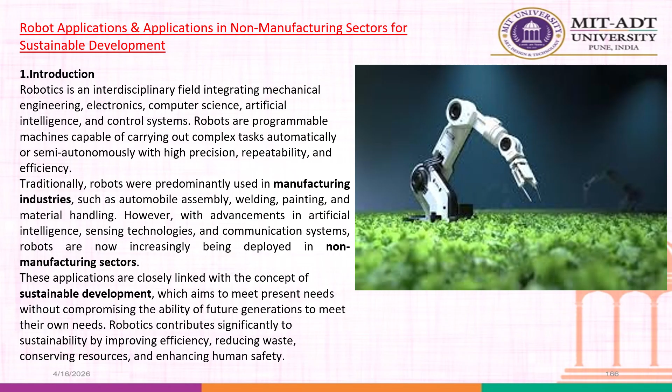Let's go to the next slide, an overview of robot applications in the non-manufacturing area. There are many more areas where robots perform very well. Firstly, robot applications can be broadly categorized into manufacturing applications.

As manufacturing application is the industrial utilization of the robot, mainly first with assembly line automation. Another purpose is welding and painting, CNC machining, and material handling. That is the manufacturing application of the robot.

Another category, 2.2, is non-manufacturing application, mainly used in the healthcare system as service robots, agriculture field robots, disaster management systems, environmental monitoring, logistics and transportation, domestic services, defense and security purposes. These focus mainly on non-manufacturing applications and their role in sustainability.

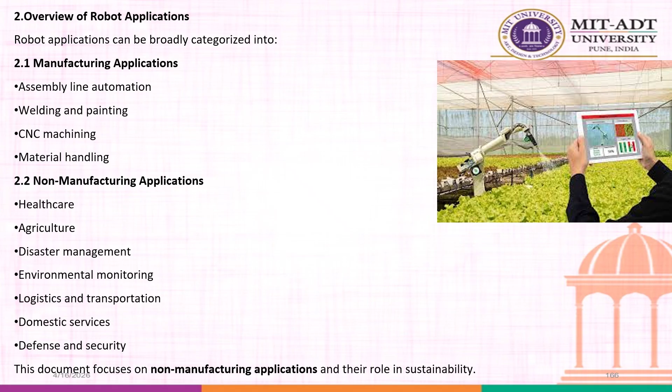Now, as per our unit content, this is the chapter for non-manufacturing application of the robot. Let's go further into application in the non-manufacturing sector. Starting with the first one.

Healthcare is one of the most impactful sectors where robotics have revolutionized operations. As seen during the COVID duration, there were many types of service robots which provided services to COVID patients at that time.

The main applications of healthcare and medical robots: first is the surgical robot, which supports the patient during surgery, enabling minimally invasive surgeries with high precision. Number two is rehabilitation robots, which assist patients in recovery through guided movements. Number three is the telepresence robot, which allows doctors to consult patients remotely. Next is the hospital service robot, which we discussed before.

Robots are used for medicine delivery, cleaning, and logistics. This is the main utilization of healthcare and medical robots.

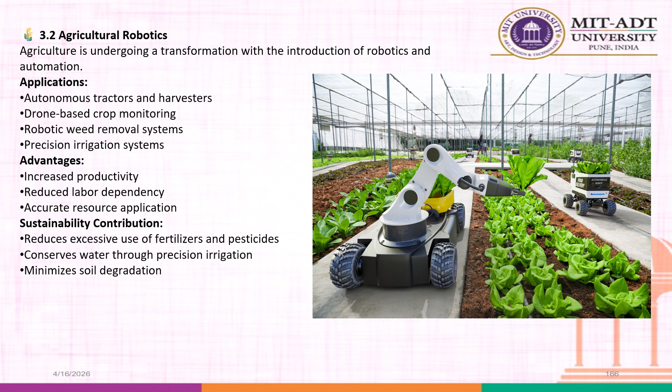For sustainability contribution, it reduces excessive use of fertilizers and pesticides, conserves water through precision irrigation, and minimizes soil degradation. That is the main use of agricultural robots.

The main applications of this type of robot include search and rescue robots in collapsed structures during disaster times, like floods or building collapses. Another application is firefighting robots, bomb disposal robots, and flood and earthquake response robots. These are some applications of disaster management and rescue robots.

Some advantages of this are that it operates in extreme conditions, meaning any type of condition, weather, or situation. It provides real-time data and reduces risk to human rescuers.

For sustainability contribution, it saves lives, enables efficient disaster response, and minimizes environmental damage. The main utilization of this kind of robot, to save human life, is its primary contribution.

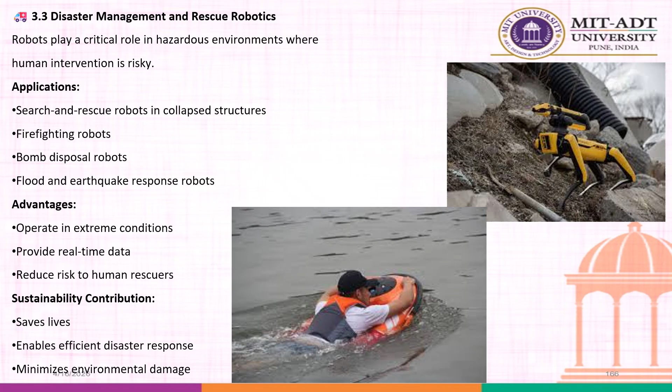Next category is environmental monitoring and protection. To keep society clean and dust-free, there is another application of robots for environmental monitoring and protection purposes.

In this field, robots are extensively used for monitoring and protecting natural ecosystems. Main applications include underwater robots for ocean exploration, air quality monitoring drones, forest surveillance robots, and wildlife tracking systems.

Some advantages of this system are that it continuously monitors environmental conditions, like dust particles and moisture content in the weather. It provides air quality monitoring via drones, and supports applications like underwater robots for ocean exploration, forest surveillance robots, and wildlife tracking systems.

The main advantage is that it continuously monitors and provides real-time data to human beings. It provides data accuracy and access to remote areas.

For sustainability contribution, this type of robot helps in climate change analysis. It protects biodiversity and supports conservation policies.

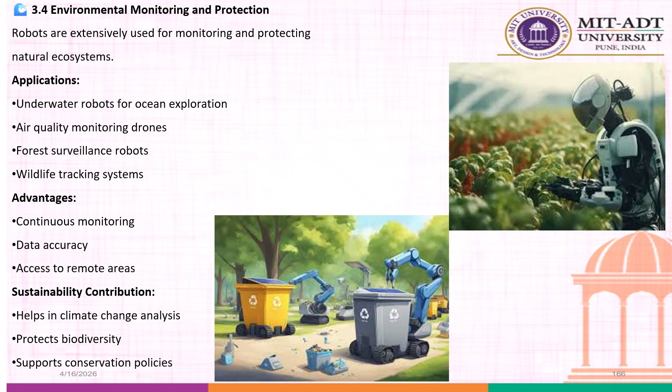Moving to the next one, 3.5: construction robotics. Construction robotics is transforming infrastructure development applications, including automated bricklaying robots, 3D printing of buildings, and inspection and maintenance robots. The main advantage of this type of robot is that it increases construction speed, improves safety, and reduces labor cost.

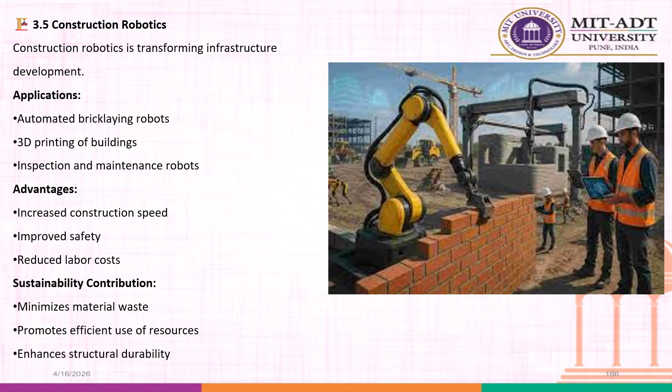For sustainability contribution, this type of robot minimizes material waste from the construction site, promotes efficient use of resources, and enhances structural durability.

Moving to the next slide: logistics and transportation. Automation in logistics has significantly improved efficiency.

Applications mainly for this type of application, using the ASRS system for a warehouse system. Applications include warehouse robots, autonomous delivery systems, and self-driving vehicles.

From this type of system, there are some advantages. Firstly, fast delivery. Number two, reduced operational cost. Number three, efficient inventory management. These are some advantages of this logistics and transportation kind of system.

For sustainability contribution in this type of system, it reduces the fuel consumption of the vehicle, lowers the carbon emissions, and optimizes the supply chains.

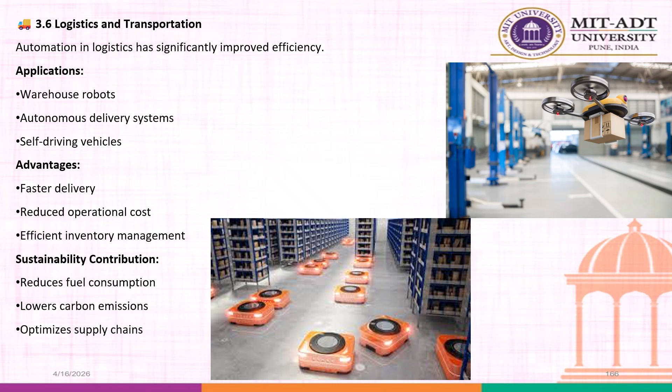Go with the next category, domestic and service robots. Mainly robots for domestic application. Robots are increasingly becoming part of everyday life. Every human wants a kind of robot for their purpose at home.

Mainly the main applications of this kind of robot are cleaning robots, personal assistant robots, and elderly care robots, which are again a kind of service robot.

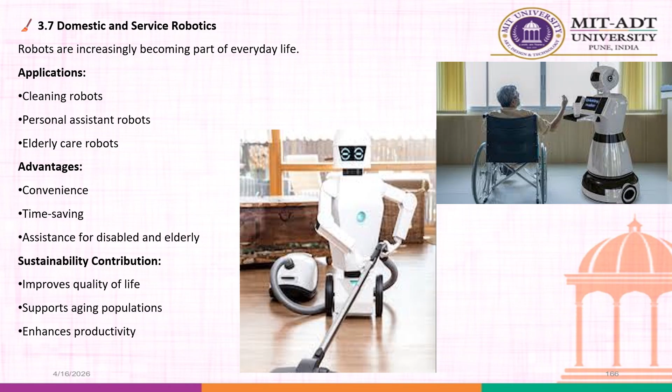The advantages from this kind of robot are convenience, time-saving purpose, and assistance for the disabled and elderly. For sustainability contribution, it improves the quality of life for human beings who are elderly or not medically fit, supports aging populations, and enhances productivity.

Go with the next category, defense and security systems. It is a main role of the robot in the non-industrial application area. Robots play a crucial role in the national security of the country.

Applications include surveillance drones, autonomous patrolling robots, and unmanned combat vehicles. These are some examples of defense and security purposes. There are numerous more examples for this field.

Mainly the purpose and advantages in this area are to reduce human risk, as we saw many times during bomb defusal, where we lost human beings checking whether a proper bomb is there or not.

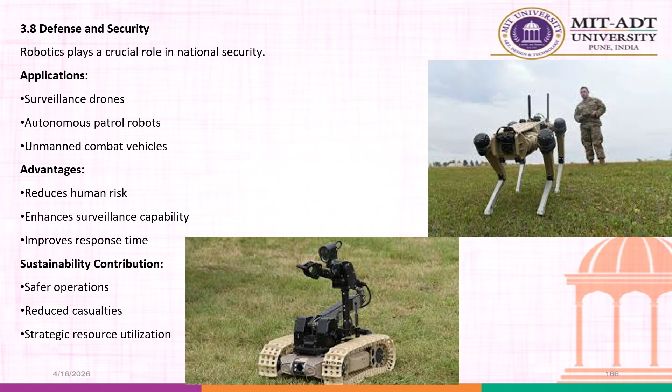That is the main advantage, to reduce human risk. It enhances surveillance capability and improves response time. For sustainability contribution, this type of robot provides safer operations, reduces casualties in our security system, and enables strategic resource utilization.

Go with the next category, the role of robotics in sustainable development. Robots contribute to sustainability in three key dimensions: firstly environmental sustainability, number two economic sustainability, number three social sustainability.

For environmental sustainability, as we see, it reduces pollution and waste, provides efficient resource utilization, and continuously monitors environmental conditions.

For economic sustainability, it increases productivity, reduces cost, and supports advancement in technological terms.

For social sustainability, it improves healthcare and safety systems, provides better living standards, and job transformation, meaning we need a skill-based role for social sustainability.

Go with the next slide. Now start with application in biomedical engineering and rehabilitation.

Biomedical engineering is an interdisciplinary field that integrates principles from engineering, biology, and medicine to develop technologies and systems that improve healthcare. It plays a crucial role in diagnosis, treatment, monitoring, and rehabilitation of patients.

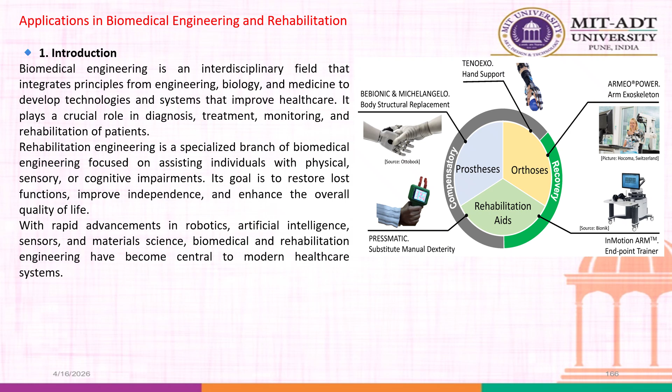Now the utilization of biomedical robots in biomedical engineering, one by one. Biomedical engineering covers a wide range of applications from diagnostic tools to life-saving devices.

Start with the first one, medical imaging systems. Medical imaging technologies allow non-invasive visualization of internal body structures. These systems are essential for diagnosis, monitoring disease progression, and treatment planning.

Now start with some types of this system. First one is X-ray imaging. Everyone knows what X-ray imaging is. It uses electromagnetic radiation to visualize bones and dense tissues.

Next one is the CT scan, known as computed tomography, which produces cross-sectional images using multiple X-ray projections. Next one is MRI, magnetic resonance imaging.

Using magnetic fields and radio waves to produce a detailed image of the soft tissue of the human body. Ultrasonic imaging uses high frequency sound waves for real time imaging.

These are some types and applications of this field: detection of tumors and fractures in the human body, brain and organ imaging, and prenatal monitoring.

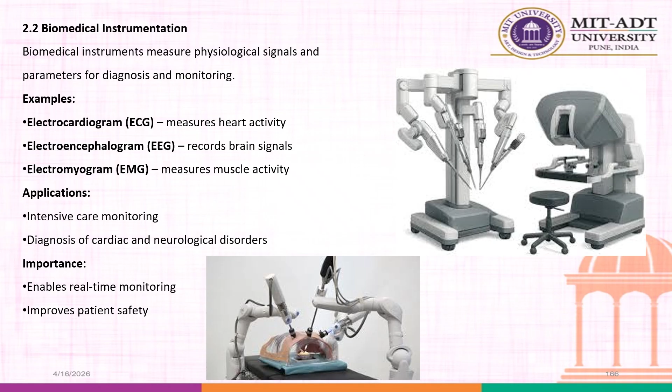There are some applications, like intensive care monitoring systems, used to diagnose cardiac and neurological disorders. The main importance is that they enable real-time monitoring and improve patient safety.

Prosthetic and artificial organs is again an innovative area for the robotics field. These devices replace or support damaged or missing biological structures of the human body. There are some types; firstly, everyone knows what a prosthetic system is.

Prosthetic limbs, upper and lower part, artificial heart valves. Next is the pacemaker for the heart, and cochlear implants.

The features of this type of system are lightweight materials, biocompatibility with the human body, and advanced control systems.

The impact of this kind of system is that it restores mobility and function of the human body very rapidly, and enhances independence.

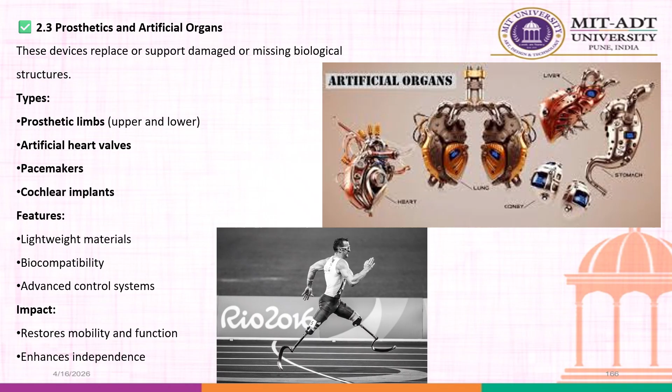Next is surgical robotics, a common type being the Da Vinci robots. A robotic system assists the surgeon in performing precise and minimally invasive procedures.

Key features: high precision, reduced human errors, smaller incisions. Applications: cardiac surgery, orthopedic procedures, neurosurgery. Benefits are mainly faster recovery, reduced pain, and fewer complications.

A few days ago there was news regarding this. How many of you are aware of telesurgery?

It's a kind of robotic surgery, or robot-assisted surgery - any type of surgical procedure that is performed with the use of a robotic system.

I think the case was from Coimbatore. There is a hospital, Ganga Hospital, where they did a robotic knee replacement.

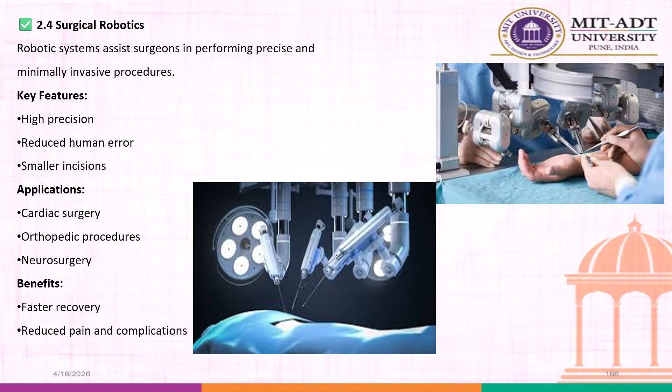In this type of telesurgery, the doctor could be in one place and the patient at another. The doctor can perform an operation with devices on the patient's body. Okay, got it, what I'm saying?

Next is the drug delivery system, a kind of nanorobots. Advanced drug delivery systems ensure that medication reaches the target area effectively.

The main types of this system are controlled release systems, implantable drug delivery devices, and nanotechnology based deliveries. Benefits include reduced side effects and improved treatment efficiency.

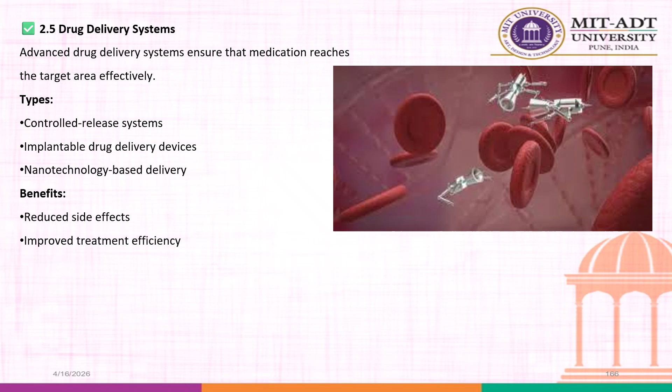Next is tissue engineering and regenerative medicine, which involves nanorobots. This field focuses on repairing or replacing damaged tissues using biological substitutes.

The main techniques used in this type of robotic system cover stem cell therapies, scaffold based tissue growth, and bioprinting systems.

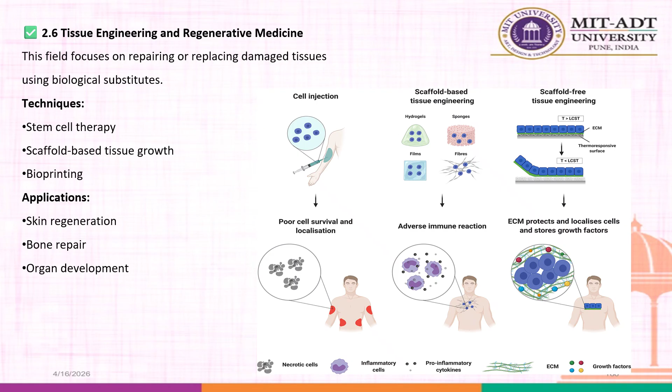Mainly, the output of this kind of system is skin regeneration, bone repairs, and organ development.

Now the next one: wearable health monitoring devices. Everyone is aware of these - wearable devices that continuously monitor health parameters of the human body.

Examples include smartwatches, which everyone knows, attached with oxygen meters and many more features.

Other examples are fitness trackers and biosensors. The main application of these devices is to monitor health issues like heart rate monitoring, sleep tracking, and chronic disease management.

Like a pedometer, for example. So these are some examples of this system.

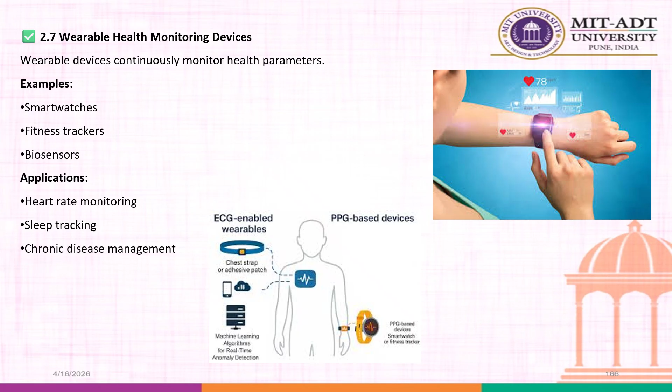Next application is in rehabilitation engineering. Rehabilitation engineering focuses on improving the functional capabilities of individuals with disabilities.

Starting with assistive devices, which help individuals perform daily activities independently. For example, wheelchairs, both manual and powered.

Next are crutches and walkers, hearing aids, and visual aids. The main importance of these is that they enhance mobility and promote independence.

Exoskeletons are wearable robotic devices that support or enhance human movement. They mainly help those with wrist or knee problems. The main feature of this type of structure is powered joints, with sensor-based control and adaptive movements. The main applications of this type of exoskeleton support paralysis rehabilitation, industrial support, and military applications.

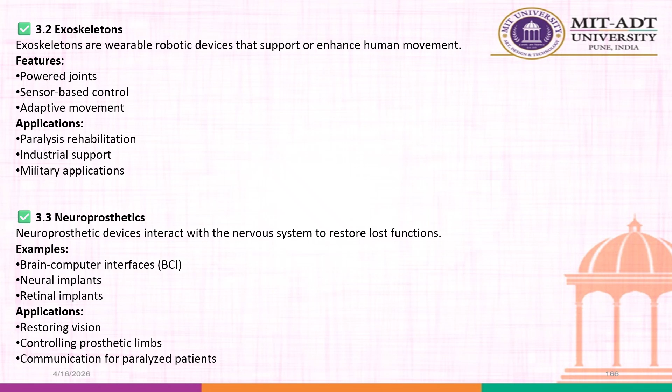Next category is neuroprosthetics. Neuroprosthetic devices interact with the nervous system to restore lost functions. Some examples are brain computer interfaces, neural implants, and retinal implants. Applications include restoring vision, controlling prosthetic limbs, and communication for paralyzed patients.

Rehabilitation robots support and assist patients in performing repetitive therapeutic exercises, like physiotherapy. There are two types: upper limb rehabilitation robots and lower limb gait training robots. Benefits of this type of system include consistent therapy, faster recovery, and reduced therapist workload.

Virtual reality and augmented reality: everyone is aware of VR and AR. This technology creates an immersive environment for rehabilitation of patients. Main applications include stroke rehabilitation, cognitive therapy, and balance training. Advantages of this kind of system include engaging therapy and real-time feedback.

Now the fourth category is the advantages of biomedical and rehabilitation engineering. It improves quality of life, enhances independence, enables early diagnosis, supports personalized treatment, and reduces recovery time.

These are examples of non-industrial applications of robots, mainly in the medical field. Now there are some challenges in this field. First, the cost of this type of robot is very high. There is limited accessibility in rural areas, a need for skilled professionals to work in this area, ethical concerns around data privacy and implants, and maintenance and reliability issues.

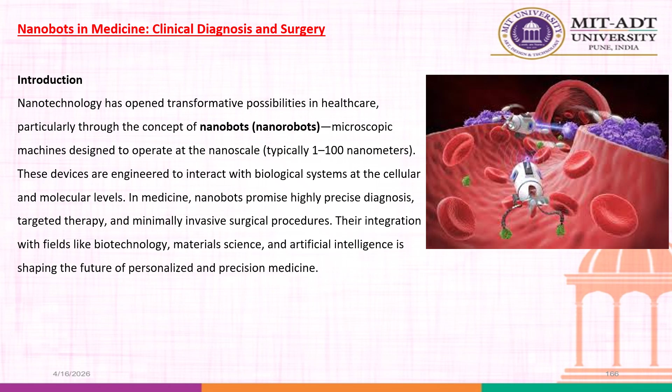Next category is nanorobots in medicine, for clinical diagnosis and surgery systems. Nanotechnology has opened transformative possibilities in healthcare, particularly through nanobots, microscopic machines designed to operate at the nanoscale, in the range of 1 to 100 nanometers. These devices are engineered to interact with biological systems at the cellular and molecular levels. In medicine, nanobots promise highly precise diagnosis, targeted therapy, and minimally invasive surgical procedures. Their integration with fields like biotechnology, material sciences, and artificial intelligence is shaping the future of personalized and precision medicine.

Starting with the utilization of nanobots in clinical diagnosis: the concept and working. Nanorobots used for diagnosis are designed to detect specific biomarkers, pathogens, or abnormal cells within a body. They can be introduced into the bloodstream or tissue, where they navigate using biological signals, magnetic fields, or chemical gradients. Once they encounter a target, such as cancer cells or infected areas, they bind to the target using surface receptors and emit signals like optical, electrical, or chemical.

It transmits data to an external monitoring system. So that is the utilization of your nanobots.

Mainly application in the diagnosis area: early disease detection. Nanobots enable detection of disease at very early stages, even before symptoms appear. For instance, detection of cancer cells based on specific protein markers, and identification of viral or bacterial infection at lower concentrations.

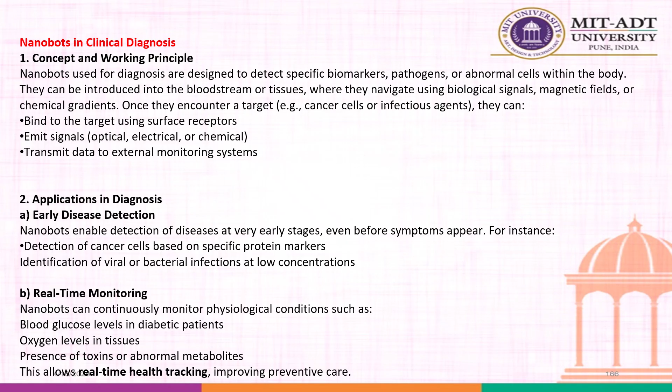Number two, real-time monitoring of the system. Nanobots can continuously monitor physiological conditions like blood glucose level in diabetic patients, oxygen level in the tissues, and presence of toxins or abnormal metabolites. This allows real-time health tracking and improves the preventive care of humans.

Next is precision imaging. Nanobots can enhance imaging techniques like MRI or CT scans by acting as a contrast agent. They improve the visibility of specific tissue or abnormalities, enabling more accurate diagnosis.

Genetic and molecular analysis. Advanced nanobots can interact with DNA or RNA to detect genetic mutations. This is particularly useful in diagnosing hereditary disease and cancers at the molecular level.

So there are some advantages in this diagnostic kind of robots: high sensitivity and specificity, early detection of disease, minimally invasive procedures, continuous monitoring capabilities, and personalized diagnostic insight of the system.

Next field is nanorobots in the surgery area. Concept of nanosurgery: nanosurgery involves the use of nanobots to perform surgical tasks inside the human body with extreme precision.

This type of operation or surgery is very critical, so precision is a very important parameter for nanobots. Unlike traditional surgery, which may involve large incisions, nanobots can access internal organs through natural pathways like blood vessels.

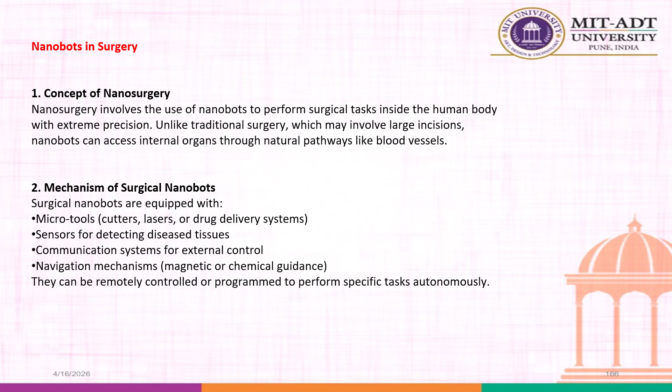Next, application in the surgery field: targeted tumor removal. Nanobots can identify and destroy cancer cells without affecting healthy tissues. They may deliver anti-cancer drugs directly to the affected area or tumor, use hyperthermia to kill cancer cells, and physically remove small clusters of abnormal cells.

Next is repair of damaged tissue. Nanobots can assist in repairing tissue at the cellular level, such as fixing damaged blood vessels, repairing nervous cells, and regenerating tissues using stem cell stimulation.

Next is clearing blockages. Heart patients know very much about blockages and the utilization of catheters in the blocked area walls. Nanobots can remove blockages in blood vessels, such as cholesterol plaques causing heart disease or blood clots leading to stroke. This can significantly reduce the need for invasive procedures like angioplasty.

Although not purely surgical, nanobots can deliver drugs to specific sites, reducing side effects and improving treatment efficiency.

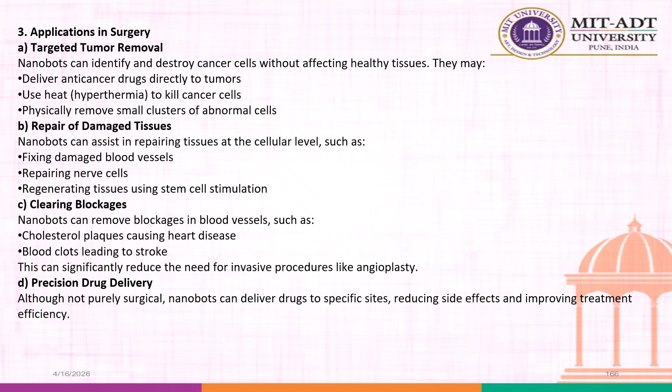Advantages in surgery: minimally invasive procedures reduce pain and recovery time, high precision and accuracy, lower risk of infections, and ability to operate in hard to reach areas. But this is only useful if a skilled person with this kind of nanorobot technology is available.

So there are some challenges with nanobots. Despite their potential, nanobots face several challenges in our society. Firstly, technical challenges: difficulty in designing and manufacturing nanoscale devices, limited power supply and control mechanisms for nanobots, and lack of navigation and targeting accuracy within complex biological environments.

Next, biological and safety concerns: possible toxicity or immune responses, biocompatibility issues, and long-term effects inside the human body.

Number three, the main challenge is ethical and regulatory issues. Ethical clearance is the main concern, along with concerns about misuse or unintended consequences, lack of standardized regulation, and high cost of development and implementation.

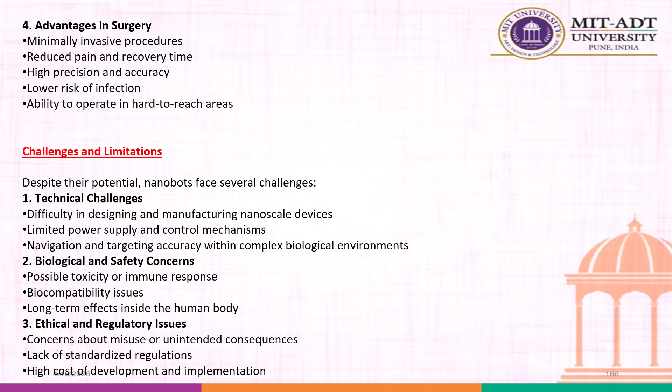So these are some challenges and limitations in the area of nanobots. Now, future prospects: the future of nanobots in medicine is highly promising.

Ongoing research is mainly focused on developing self-powered nanobots, enhancing AI-based decision-making capabilities for nanobots, improving biocompatible materials, and enabling swarm nanorobotics for coordinated actions.

In the forthcoming years, nanobots may revolutionize healthcare by enabling fully automated diagnosis systems and treatment. They will personalize medicines tailored to individual genetic profiles and provide real-time monitoring and intervention. That is the main future prospect of the system.

Now let's go to the conclusion. Nanorobots represent a groundbreaking advancement in medical science, offering innovative solutions for both clinical diagnosis and surgical procedures.

Their ability to operate at the molecular level enables early detection of disease, precise treatment, and minimally invasive interventions. While challenges remain in terms of technology, safety, and ethics, continued research and development are likely to overcome these barriers.

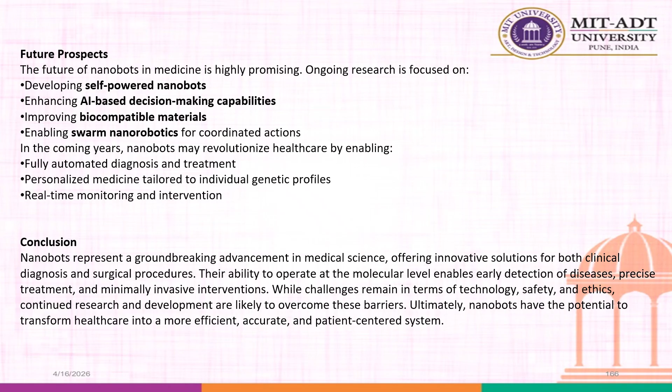As we saw, there are many challenges for nanorobots. Ultimately, nanobots have the potential to transform healthcare into a more efficient, accurate, and patient-centered system. That concludes the topic of nanobots.

Let's go to the next application. Everyone is very much aware of robotic applications in industry. There are many applications available in industrial terms. Industrial robotics refers to the use of programmable mechanical devices to perform tasks in manufacturing and production environments.

These robots are designed to increase efficiency, accuracy, safety, and productivity while reducing human effort and operational costs. Modern industrial robots are equipped with advanced sensors, control systems, and artificial intelligence capabilities that enable them to perform complex operations with high precision.

An industrial robot is typically defined as an automatically controlled, reprogrammable, multi-purpose manipulator, programmable in three or more axes. These robots are widely used in industries such as automotive, electronics, aerospace, pharmaceutical, food processing, and logistics.

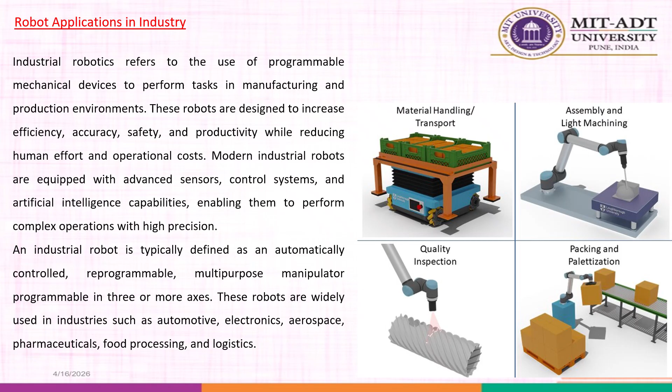Let's go to the next one: the evolution of industrial robots. The journey of industrial robots starts with the first one in 1960.

The first industrial robot was Unimate, invented by General Motors, in 1960 - a robotic arm designed for repetitive tasks. Over time, advancements in computing, electronics, and control systems led to the development of more sophisticated robots capable of handling complex operations.

The first 6-degree-of-freedom robot was the Puma 560. I think everyone knows what Puma 560 is - Puma stands for Programmable Universal Machine for Assembly. It is specifically a 6-axis, 6-degree-of-freedom industrial robot, developed by the Unimation company in 1978.

It was designed for repetitive tasks like assembly and welding, and is widely recognized for its foundational role in robotic systems. Let's go to the next one.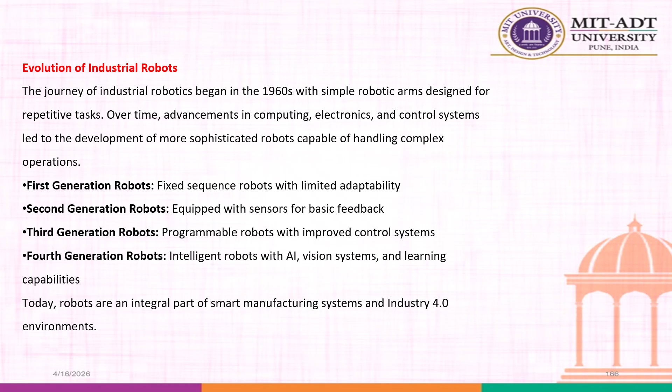Now these are the some fourth generation of your systems. First industrial revolution, second industrial revolution, that means late 18th century, after that the beginning of the 20th century. Then 1970 to 2000, that is the third generation of the revolution. And now the fourth one, after the year 2010, that means the utilization of AI, integration of sensors in your system. So that is your fourth generation of the robot revolution.

Right, go with the next one. Now the time for your industrial application or robotic application in the field of industry. There are many more applications, like material handling, machine loading and unloading, for assembly purpose, for inspection purpose. So need to replace human labor by a kind of robots.

Mainly the work environment is hazardous for human beings. That is an example where the space is very narrow, like in nuclear industry. So in that type of field we need a kind of robots, and it performs the repeated task. Okay, and there's another need when humans feel boring and unpleasant tasks. So robot is the best choice.

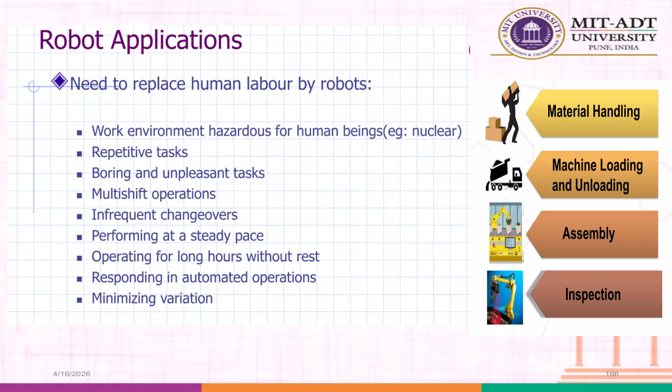Multi-shift operation: it needs no leaves, no breaks, so it is capable to perform work in multi-shift. Infrequent changeovers: it performs at a steady pace, operating for long hours without rest, responding in automatic operation, and minimizing the variation and providing very precise results.

So mainly industrial application, industrial robotic application can be divided into: first, material handling application, processing operations, assembly application, inspection operation.

In material handling, it involves the movement of material or parts from one location to another. One common example is pick and place, but applications are something different.

Some examples are like pick and place, palletizing, depalletizing, machine tending. So there are so many applications available for material handling using your industrial robot. It involves the movement of materials or parts from one location to another, includes part placement, palletizing or depalletizing, like that.

So next one is the processing operation. Requires the robot to manipulate a special process tool as the end effector. Applications include spot welding, arc welding, riveting, spray painting, machining, metal cutting, deburring, polishing. So these are some machining processing operations with the tool attached on your end effector. That is another application of your industrial application.

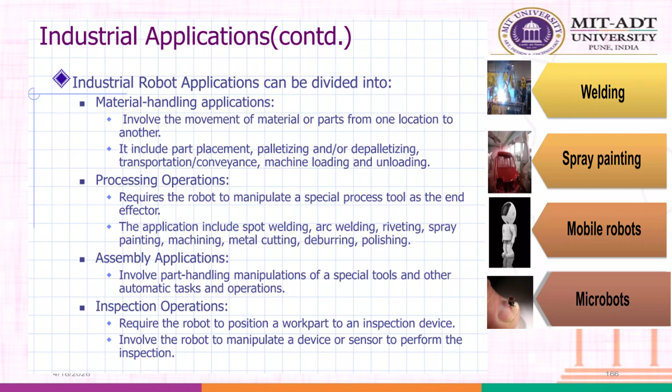Third one is the assembly application, utilized with a kind of jaw, involving part handling, manipulation of special tools and other automatic tasks and operations. For the inspection operation, it requires the robot to position a work part to an inspection device. It involves the robot manipulating a device or sensor to perform the inspection.

Okay, starting with the material handling application. The main category includes the following: part placement, palletizing, depalletizing, machine loading and unloading of the workpiece on a particular area, stacking, and insertion operations. So the robot must have the following features to facilitate the material handling.

Firstly, the manipulator must be able to lift the parts safely as per its payload capacity. The robot must have the reach needed. The robot must have the cylindrical coordinate type or as required. The robot controller must have large enough memory to store all the program points so that the robot can move from one location to another location.

Just an example of pick and place: the robot must have the speed necessary for meeting the transfer cycle of the operation and to manage your productivity or packaging concept.

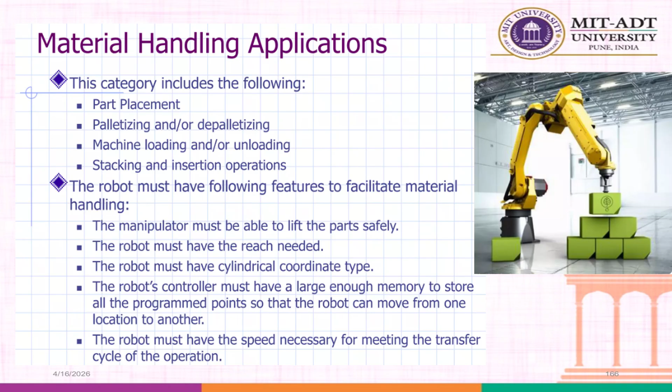Okay, go with the next one: part placement. The basic operation in this category is the relatively simple pick and place operation. This application needs low technology robots of the cylindrical coordinate type system. Only two, three, or four joints are required for most applications. Pneumatically powered robots are often utilized; even hydraulic powered robots can be used in the system.

Next one, palletizing: the application requires the robot to stack parts one on top of the other - that is the palletized system - and to unstack parts by removing from top one by one, that is depalletizing. So utilization of this type of application is mainly in ASRS, that is automatic storage and retrieval system. Example: process of taking parts from the assembly line and stacking them on a pallet, or the vice versa.

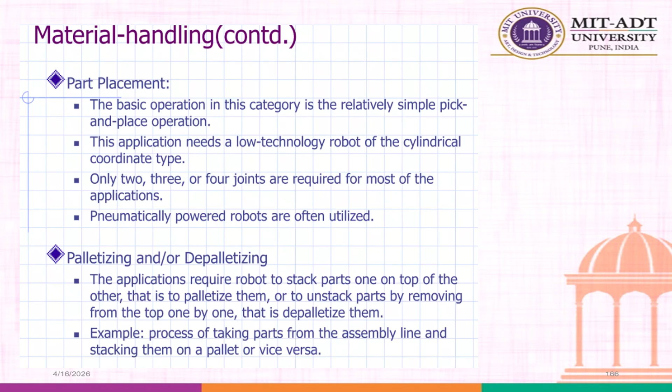The next one, machine loading and unloading. That means placing the specific specimen on the die on a particular operation platform. So the robot transfers parts into and out from the production machine. There are three possible cases. Firstly, machine loading, in which the robot loads parts into a production machine, but the parts are unloaded by some other means. For example, a press working operation where the robot feeds a sheet blank onto the press, but the finished parts drop out of the press by gravity.

That is one example of a press working operation. Another is machine loading, in which the raw material is fed into the machine without robot assistance.

The robot unloads the parts from the machine, assisted by vision or no vision. Examples include bin picking, die casting, and plastic molding.

Third is machine loading and unloading, which involves both loading and unloading of work parts by the robot. The robot loads raw work parts into the process and unloads a finished part, for example in a machining operation. These are the three possible cases for machine loading and unloading.

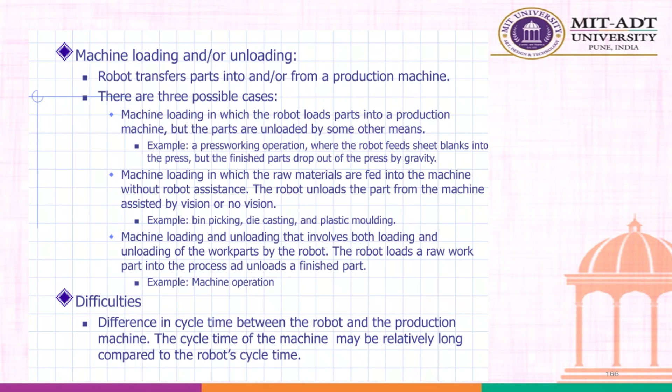The difficulty is the difference in cycle time between the robot and the production machine. The cycle time of the machine might be relatively long compared to the robot cycle time, so you have to manage that.

Go with the next one: stacking and insertion operation. In the stacking process, the robot places flat parts on top of each other, where the vertical location of the drop-off position is continuously changing with the cycle time. In the insertion process, robots insert parts into the compartments of a divided container.

Next, processing operation, that is machine processing operations. In this system, the robot performs processing procedures on the part. The robot is equipped with a type of process tooling, like drilling or reaming tools, on its end effector, and manipulates the tooling relative to the work part during the cycle.

Industrial robot applications in processing operations mainly include spot welding, continuous arc welding, spray painting, metal cutting, deburring operations, various machining operations like drilling, grinding, laser and water jet cutting, riveting, rotating and spindle operations, and adhesive and sealant dispensing. So you attach a tool at the end effector and the robot can perform a processing operation as per your requirement.

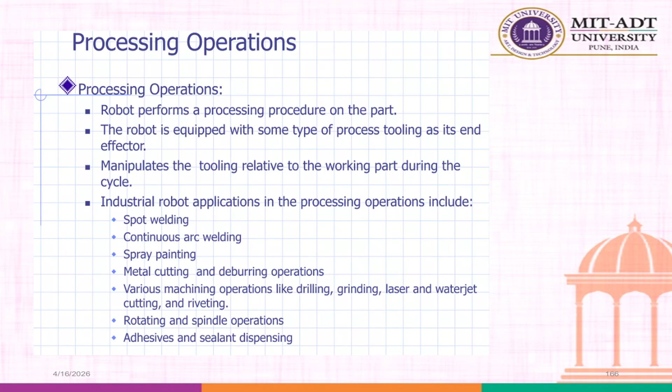The application involves both material handling and manipulation of a tool. They typically include assembling components to build the product and performing material handling operations. These are traditionally labor-intensive activities in industry, highly repetitive and boring, and hence are logical candidates for robotic application.

They are classified as batch assembly and low volume. In batch assembly, as many as 1 million products might be assembled; the assembly operation has long production runs. In low volume, that is small batch production, a sample run of 10,000 or fewer products might be made.

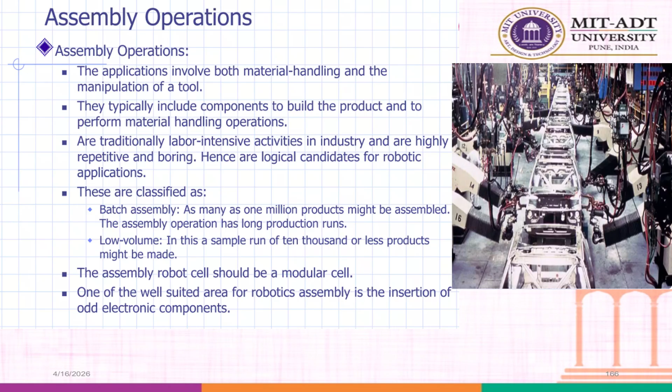So the assembly robot cell should be modular. One of the well-suited areas of robotic assembly is the insertion of odd electronic components.

The next one is inspection operation, which means checking the quality of your specimen using robots.

Some inspection requires parts to be manipulated, and other applications require that an inspection tool be manipulated. Inspection work requires high precision and patience, and human judgment is often needed to determine whether a product is within quality specification or not.

Inspection tasks performed by industrial robots can usually be divided into three techniques. Number one, using a feeler gauge or LVDT: the part being measured comes into physical contact with the instrument, or by means of air pressure which causes it to rise above the surface being measured.

Number two, by utilizing robotic vision: matrix video cameras attached to the end effector are used to obtain an image of the area of interest, which is digitized and compared to a similar image with a specified tolerance already stored in your image library.

Number three, by involving the use of optics and light: usually a laser or infrared source is used to illuminate the area of interest for inspection purposes. That is the utilization of inspection operation.

Go with the next inspection operation: the robot may be in an active or passive role. In the active role, the robot is responsible for determining whether the part is good or bad.

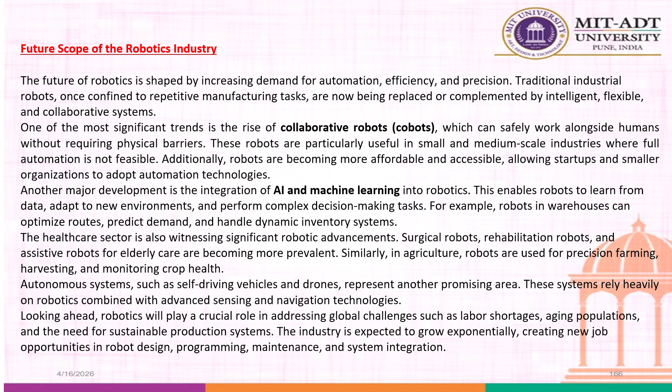Looking further, robotics will play a crucial role in addressing global challenges such as labor shortages, aging populations, and the need for sustainable production systems. The industry is expected to grow exponentially, creating new job opportunities in robot design, programming, maintenance, and system integration.

Next is robots in Industry 4.0, and further, robots in Industry 5.0. Industry 4.0 refers to the fourth industrial revolution, characterized by the integration of digital technologies into manufacturing and industrial processes. Robotics is a key enabler for this transformation. In Industry 4.0, robots are no longer isolated machines but part of an interconnected system that communicates with each other through the Internet of Things - an era where machines communicate with each other.

These robots can share data, coordinate tasks, and optimize operations in real time. Smart factories are a hallmark of Industry 4.0. In such environments, robots work alongside sensors, data analytics platforms, and cloud computing systems to achieve a high level of automation and efficiency. For example, robotic arms in a production line can adjust their operation based on real-time data from sensors monitoring product quality. That is the example of an assembly line.

Another important aspect is flexible manufacturing. Unlike traditional systems, Industry 4.0 robots can quickly adapt to changes in product design or production requirements. This is particularly useful in mass customization, where products are tailored to individual customer needs.

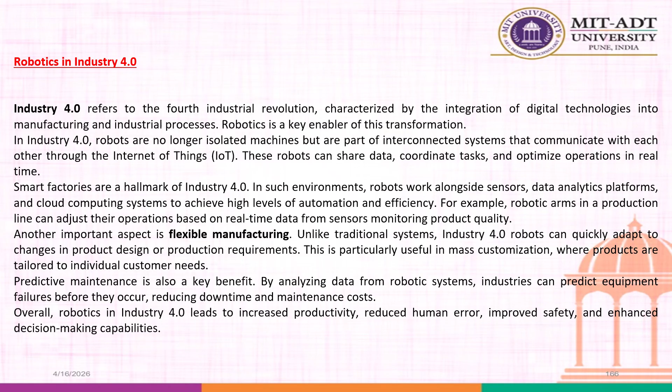Predictive maintenance is also a key benefit. By analyzing data from robotic systems, industries can predict equipment failures before they occur, reducing downtime and maintenance cost. Overall, robotics in Industry 4.0 leads to increased productivity, reduced human error, improved safety, and enhanced decision-making capabilities. Go with the next slide.

The digital twin is a new kind of technology that lets you simulate your work. Digital twin technology is a revolutionary concept that involves creating a virtual replica of a physical system. In robotics, a digital twin represents a robot or an entire robotic system in a simulated environment. This technology allows engineers to design, test, and optimize robotic systems without physically building them. With this system, you can create a robot as per your design and simulate it in the same environment as you want, in a physical way.

For instance, before deploying a robot in a factory, its digital twin can be used to simulate its performance under various conditions as per your choice and needs. This reduces the development time and cost.

Digital twins also enable real-time monitoring and control. Data from sensors on the physical robot is continuously fed into its digital counterpart, allowing operators to track performance, detect anomalies, and make informed decisions.

Another important application is predictive maintenance. By analyzing the digital twins, potential issues can be identified before they lead to system failures. This enhances reliability and extends the lifespan of the robotic system through its digital twin.

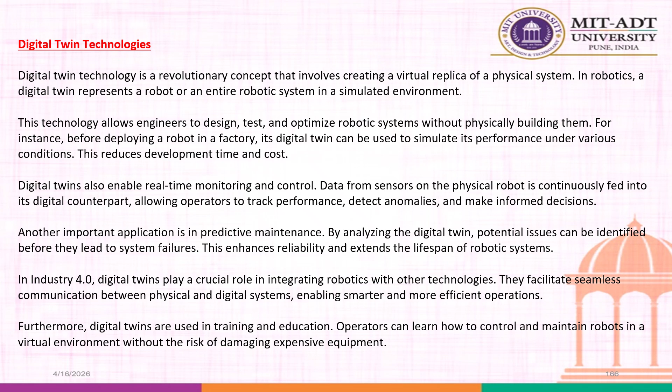This is achieved through technologies such as computer vision, natural language processing, and machine learning. One key feature of cognitive robotics is perception: robots can recognize objects, understand a scene, and interact with their surroundings in a meaningful way. For example, a cognitive robot in a warehouse can identify different products and handle them appropriately, arranging each product in its particular storage area.

Another important aspect is learning. Cognitive robots can improve their performance over time by learning from previous operational experience, making them suitable for dynamic and unstructured environments where predefined programming is not sufficient. Human-robot interaction is also enhanced in cognitive robotics: robots can understand voice commands, respond to human gestures, and collaborate more effectively with people.